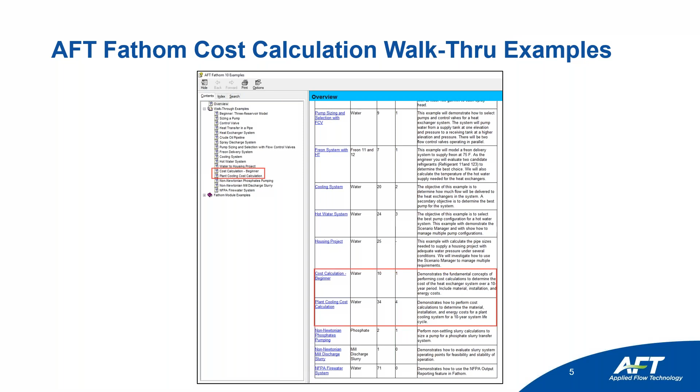All right. So calculating costs can be done with AFT Fathom and AFT Arrow. Obviously, I'm going to be demonstrating this capability with AFT Fathom today, but the process in AFT Arrow is exactly the same. So nothing's different. So if you have AFT Arrow, you can do the same thing that I'm doing here with Fathom today.

So you can easily report the following types of costs: material costs, installation costs, those would be your non-recurring, and then you can also do maintenance costs as well as energy costs. And you can apply these types of costs to just about anything in your model, the junctions, pipes, as well as the fittings and losses. So if you have tees in your model or bends, you can also include those in your physical graphical model, and we can account for those costs as well.

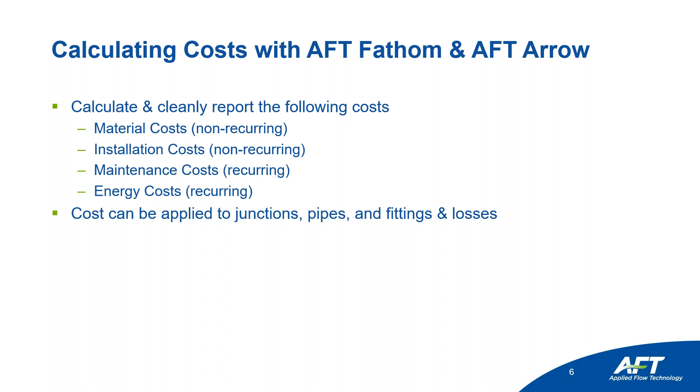And when you do your cost calculations, you're going to be using engineering databases a lot as well as cost databases. And again, if you watched the previous webinar that I did on database management, that was all about engineering databases. A cost database would be associated with a particular engineering database. You're going to see exactly what that looks like in today's webinar. You can also have multiple cost databases for a single engineering database, different vendor costs, different currencies, etc.

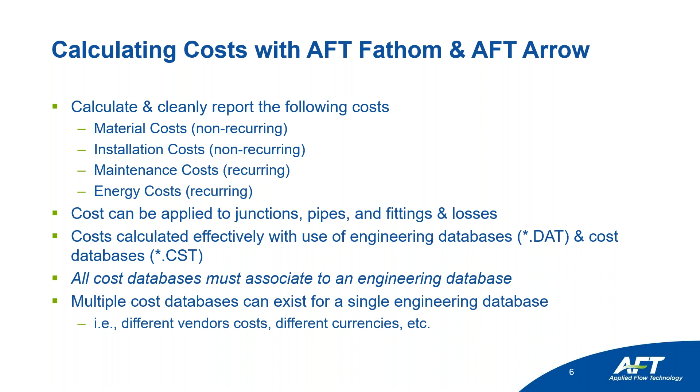So here's how databases are related to each other in the software. I have my overall Fathom model, and then in the database manager, which you'll see today, you can have multiple engineering databases and cost calculation databases. There are several engineering databases that are already built into AFT Fathom. There's the AFT default internal database that contains all of your loss factors. It contains fluid properties, insulation data sets, even things that you wouldn't actually calculate costs for. That's where we've included all of our fluid information, the AFT standard fluids. That AFT default internal database is an engineering database.

The AFT local user database is an engineering database. So anything that you create that's custom on your computer, whether it's custom pipe materials, custom fluids, custom components, custom fittings, all of that information is going to be stored in your local user database on your computer until you share it with somebody else. That local user engineering database is an engineering database.

And then finally, we have all of our pipe materials that we have included for you. Those are engineering databases. So in my plant cooling model today, I'm actually going to have 3 engineering databases. I'm going to have the steel ANSI pipe material database that's built into AFT Fathom. I'm going to use the default AFT internal database for the fittings and losses on my pipes. And then there's an external engineering database, which is a custom database for my pumps. And then I have my material and installation costs available for all of those.

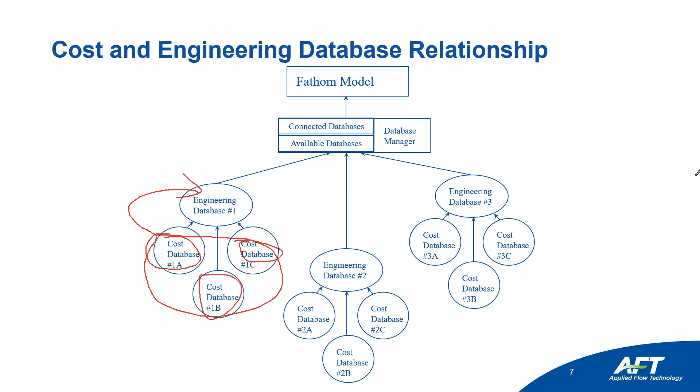So again, the reason why you can have multiple cost databases for a single engineering database is if you have steel piping, you can have different cost databases that you would use, which could be different vendor costs or different regions, different currencies. And so all of those can be associated to one single engineering database. Today, I'm only dealing with one cost database per engineering database.

All right, so the way that you would enable your cost calculations is really easy. You just go to the analysis menu in AFT Fathom, and then under cost calculations, you would choose to do either pump energy only or calculate. Pump energy is just a quick and dirty method of being able to quickly calculate what your energy costs are. So if you have multiple pumps in a model and you just want to know how much it's going to cost to run your pumps, then that's where you could just keep it simple and do energy costs.

The second option is obviously more advanced, and that's where you can calculate all of your system costs. So if you click on calculate, you could do material, installation, maintenance, and energy. And that's what we're going to do today. We're going to do material, installation, and energy costs. We're not going to do any maintenance costs in today's example.

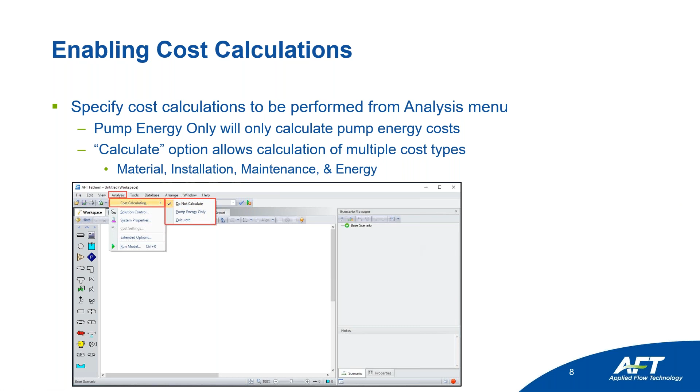A quick aside is we don't have labor costs listed here. So what you might do if you want to account for labor costs is perhaps include that as more of a maintenance cost item. And that's how you could probably account for labor costs if you want. But this is just really giving you a good idea of how much the system will cost by itself, not the people required to build it.

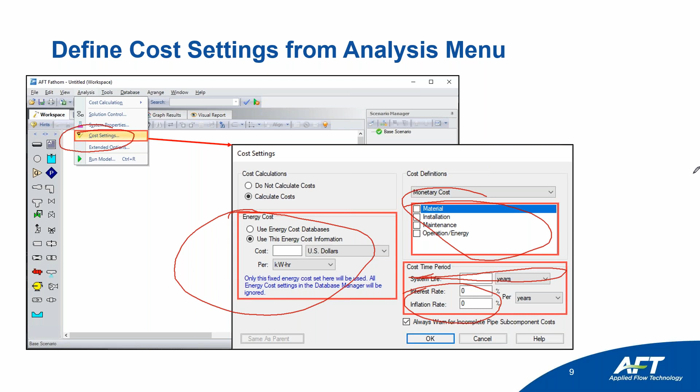All right. After you go in and determine which types of costs you're going to calculate, you then have access to the cost settings window. This is where you define your energy cost information and which types of costs you're going to calculate. You can enter a system life, years, months, days. You can do interest and inflationary rates, a lot of flexibility there. And we're going to see that here really quick with our model.

So this is the plant cooling system that I'm going to calculate the costs for you. So in this particular model here, I have a cooling water system where I've got cooling tower basins right here, and then from those basins, we've got 4 pumps here in parallel, and those are going to circulate water through the system out each of these individual spray nozzles. And so that's my system here.

Wherever you see these little ampersands, that's a new feature that we came out with in AFT Fathom 10 and AFT Arrow 7. And what that little red ampersand means is inside those pipes, if you were to open up the pipe property window, we've included fittings and losses. So that's a good visual indicator on which pipes we've included fittings and losses for. So you can account for costs in those fashions as well.

So when you're building your model of your system and you want to do your cost calculations, you don't have to use a whole bunch of junctions like elbows and area changes just to account for their costs. You can include them in the pipe itself, and then that's how you'd be able to keep your model simplified and still know how much everything's going to cost.

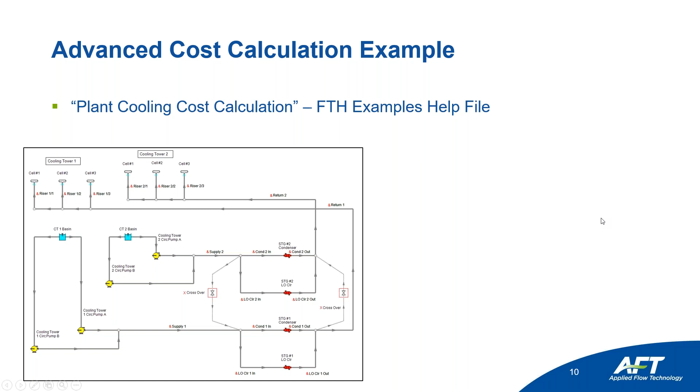All right, so what I'm going to be calculating today is several different types of costs in this model. So this is the plant cooling cost calculation example. We want to determine what the material, installation, and energy costs will be over a 10-year period. And so there are several databases that are going to be used in this example. There are 3 engineering databases for this system, which are already pre-built.

The first one is the Steel ANSI Pipe Material Database. That's what we have included with the standard software so you can use steel piping. That's the engineering database that we're going to use for the pipes. Second is we have the AFT Default Internal Database. Again, this is a database that contains all of our handbook loss factors and loss models, the AFT standard fluid information, etc. So the AFT Default Internal Database is going to be our engineering database for the fittings and losses.

So if you want to calculate the costs for the fittings in these particular pipes here, we're going to associate that cost database that we'll create from scratch with the AFT internal standard database. All right. And then last but not least, we have an extra database that is created for this example. So if you are working through the walkthrough tutorial, it will show you how to connect the plantcooling.dat database. That's a database that contains essentially just the pump curve information. So when we connect that database for the pumps, we can do the calculations for the pumps as well. So the plantcooling.dat file, that's our engineering database file for pumps.

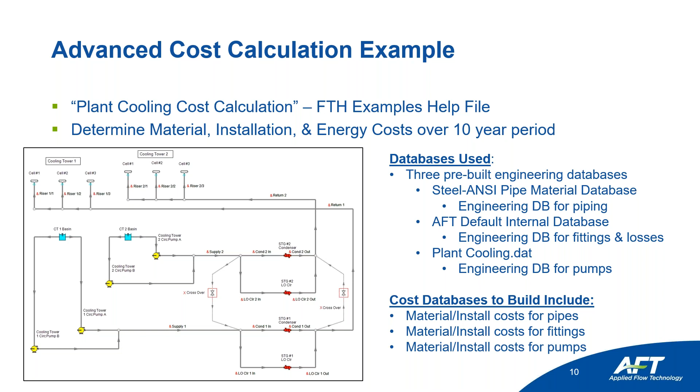And then the cost databases that we need to build from scratch for this system are going to be the material and installation costs for the pipes, material and installation costs for the fittings that are lumped into the pipes, and then finally the material and installation costs for the pumps. I have all my cost information here in a spreadsheet. So these are my costs for Schedule 20 steel piping, and I have ranging diameters from 8 inches up to 30 inches, and then I have material and installation costs in terms of dollar per foot.

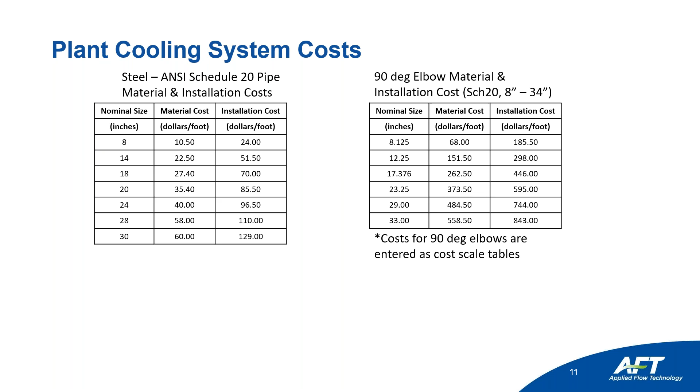And then I have material and installation costs for the 90-degree elbows that I've lumped into the pipes. So we're going to do the elbow cost in a little bit different of a fashion. We're going to use what we call cost scale tables. And the cost scale tables make it easier to create your elbow costs just based upon how the pipe size scales itself. So here's all of our cost information that we're going to use there.

And then last but not least, we have our pump cost information for the material and installation. So the cost of the pumps is just under $29,000. Installation costs under $13,000. Keep in mind, all of these costs were built for the plant cooling cost calculation example, which was probably developed 10 to 15 years ago. So these costs are very, very old. And nowadays, if you were trying to do the same cost, the cost values would probably be a lot more. So just go with it.

A little aside is if you wanted to start with these costs and then you know how much these costs have scaled up over time, you can use cost multipliers. I'm not going to talk about that today. You can read about what cost multipliers are in our help file. But if this is all the information you have and you have an idea of how much those costs have increased over the years, the cost multipliers can help you start with these costs and then it'll automatically multiply them for your actual cost calculations for what it would be today.

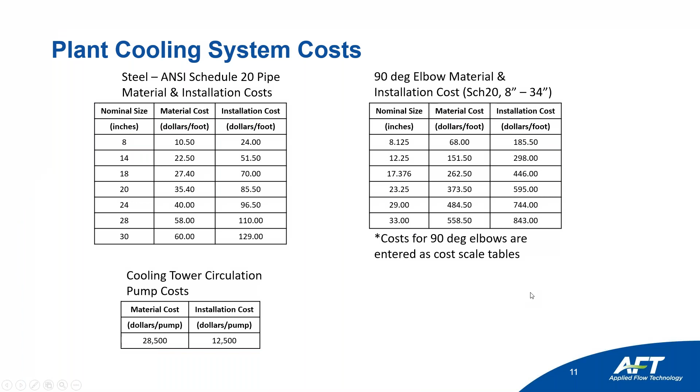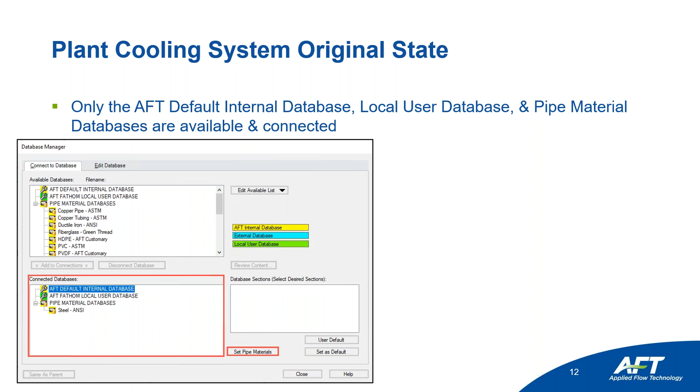All right, so this is probably the last slide that I'll be showing before I jump into the model here. So yes, it is. So let me go ahead and jump into AFT Fathom now. So I'm going to move my PowerPoint over to the side here, and here's my Fathom model. So this is the Fathom model that I really stripped everything down. I stripped out all of the database, like the plant cooling database for the pumps, etc.

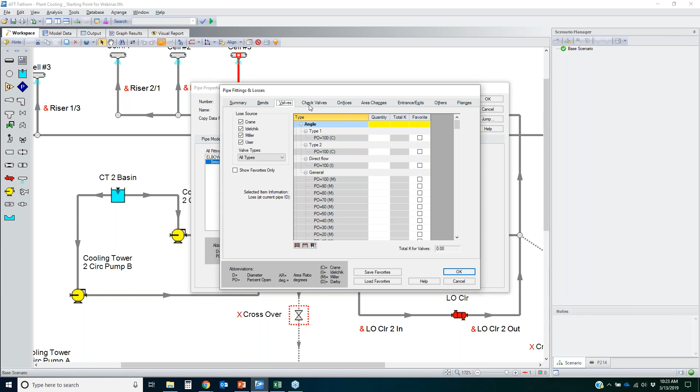So you can do elbows, valves, check valves, orifice plates, etc. So any of these fittings that you're lumping in with the pipe fittings and losses tab, we can account for those costs when they are lumped into this list right in here.

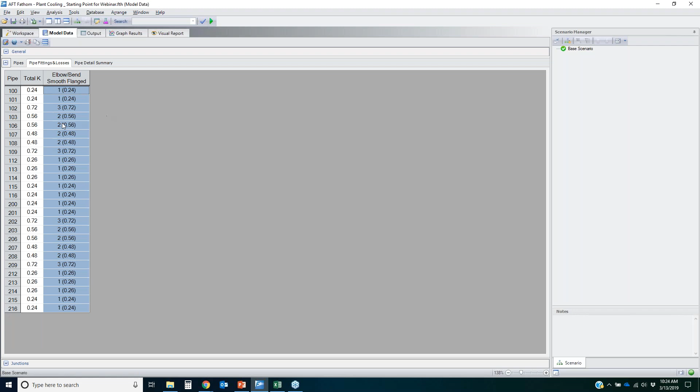So if I close out of this window here and I go to the model data tab, you can see on the fittings and losses tab here that there are several pipes which contain additional fittings. So some pipes have 3 elbows, some only have 2, some only have 1. You can see what the total K factor is for that, and we're going to account for all of those costs as well. Just for keeping these calculations simple, we only have elbows, but we could throw in other fittings as well if we want to.

In addition to the pipe fittings and losses, if you go to the pipes tab here, this contains the input information for all of your pipes throughout the model. So I've given custom names to all the pipes here, and if we scroll over to the right, they're all based upon the steel ANSI material. So if I open up one of these pipes here, in each of the pipes, I've chosen steel ANSI from the drop-down menu, and I'm using Schedule 20 as the type. So there's Schedule 20 for all the pipes. Note that that is different than using standard Schedule 20.

So one little aside is that if you're doing these cost calculations and you use standard Schedule 20, but you build your cost database for the piping using regular Schedule 20, you wouldn't see the cost. So you've got to make sure that when you're defining the cost, it matches what you've defined here in this drop-down menu, which in my case is going to be Schedule 20. Now, the reason why you're not seeing a whole list of other pipe materials in this drop-down is because I've hidden those items, and I'm going to show you how you can do that.

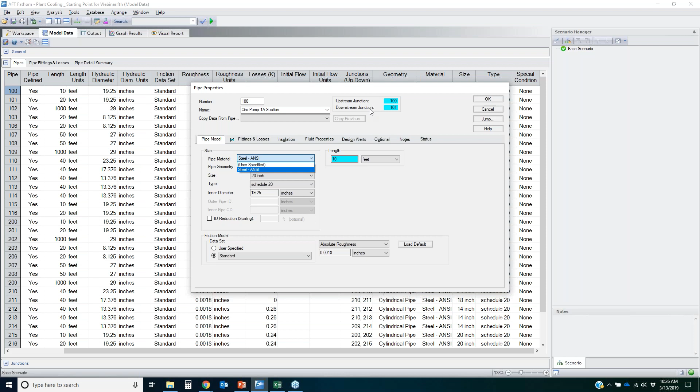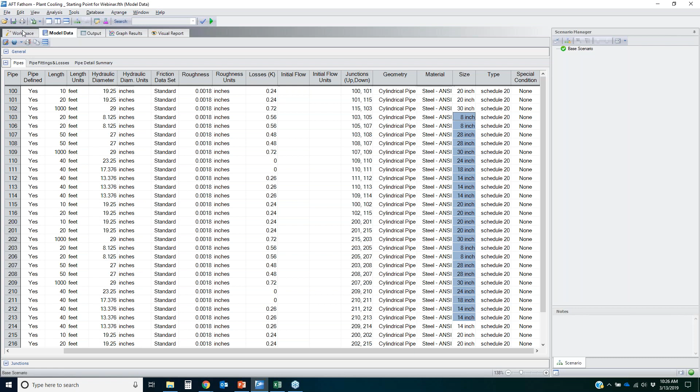So here's all my piping information, and you can see how my sizes range from 8 inches in diameter up to 30 inches in diameter. So now back to the workspace here. If I go into the database menu, the database manager tells you which databases are available and which ones are connected. The available databases are databases that are available for you, but the connected ones are the ones that you're actually going to be using in this particular model.

If you read the blog articles that I wrote on databases, then you'll understand better what the differences are between available and connected. Basically, if you want to use a database at all in your model, you just have to make sure that it's actually connected. And by default, when you add a database, that will usually automatically connect it for you. So here, if I click on this drop-down menu for available databases, there's all of these pipe material databases that we have included for you in the software.

So the internal default database, if I select that and review the content, then you can see here that we've got all of these fluids that we've built in for you. So these are the AFT standard fluids. We have various insulation data sets, and we've got fittings and losses. So the default internal database contains all of this information for you.

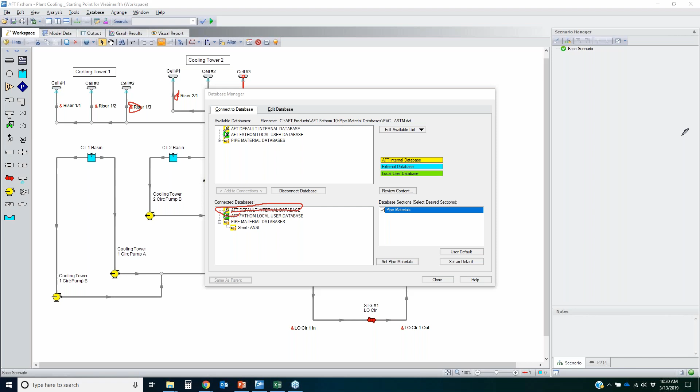The steel ANSI database here is the engineering database that will be used for the pipe material and installation costs. The default internal database is going to be used for the material and installation costs of the pipe fittings for the ones that have the little ampersand on them. And then finally, there's an external database file that we will add in a little bit later for the pumps.

So the way that I'll access that database is by clicking on Edit Available List, and then I'll add an engineering database. And then once I find the database I need, which is this guy, I can open it and it will connect it and make it ready for me. I'm not going to do that yet. I'll do that here in the next few minutes. So this is my starting point.

All right. So here's how you start with doing the cost calculation. So I'm going to go to Analysis and then Cost Calculation, and I'll click on Calculate. So that activates cost calculation abilities for me. Now, one quick thing is if I go to the red status light right here, when you turn on one of the cost calculation options here, either pump energy or calculate, there's a new checklist item that becomes available, specify cost settings.

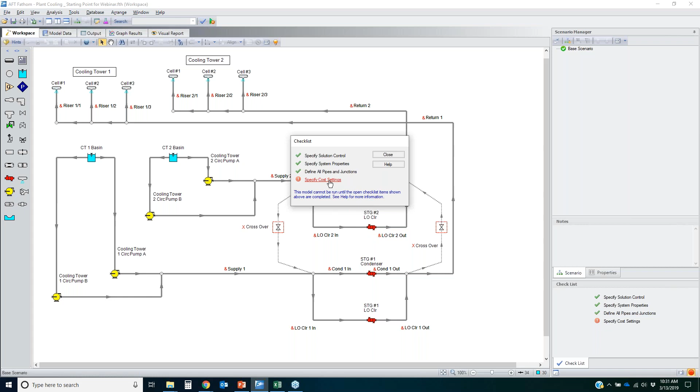So if you want to do cost calculations, you have to define that information. If I tried to run my model, it wouldn't let me because I'm missing some information. It would say, define your cost settings. So I can access the cost settings window just by clicking on it here, or I can access the cost settings window by clicking here, or I can go there by hitting the Analysis menu and then Cost Settings.

So in this model here, you could use an energy cost database if you want, but in my case, I'm just going to use a constant energy cost, which is going to be 10 cents per kilowatt hour, keeping it simple. And I'm going to do material, installation, operation, and energy costs. I'm going to do a system life of 10 years. Now, you have a lot of flexibility with doing different unit sets for costs.

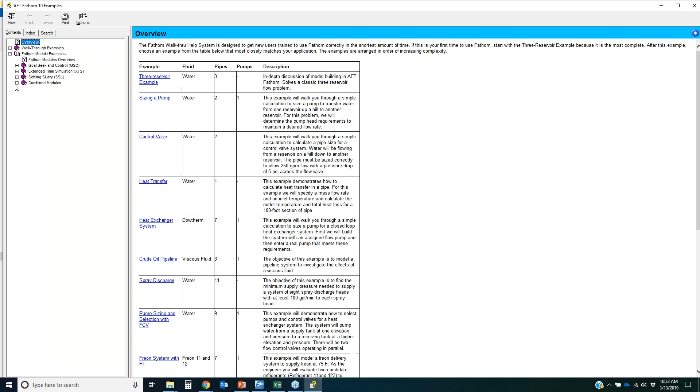So one example, let me show you a quick example here. If you open up the Fathom Examples help file and you go to Fathom Modules and then Combined Modules, this is a really interesting example because this simple system uses the goal seek and control module, the extended time simulation module, and cost calculations at the same time. So on my assigned flow junction here, I have a flow rate that is changing throughout a 24-hour period. So that's my changing flow demand.

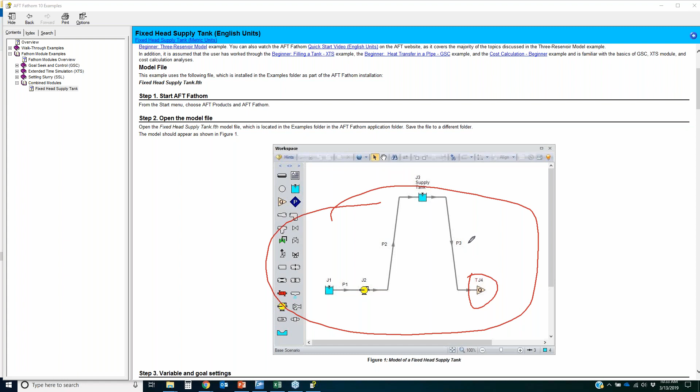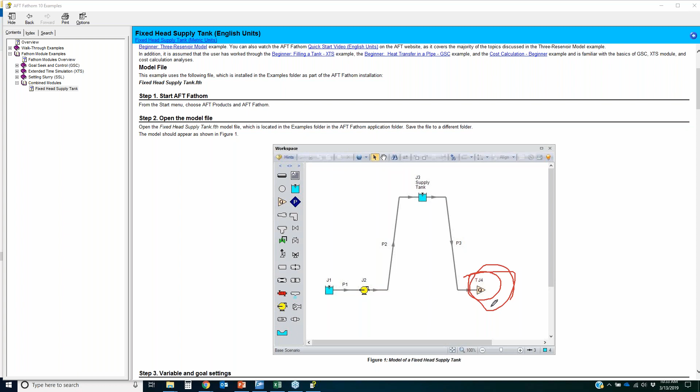And then I want to do a finite tank right here. And so GSC I'm using to change the pump speed at each time step to maintain a constant liquid height. And I want to calculate the cost of my pump energy. So the key thing is the transient data with XTS that I use to apply for my changing flow demand here is over a 24-hour period. But I want to know how much it's going to cost to run my pump in the same fashion over the 24-hour period for a year.

So this is where you can do an XTS, a transient simulation for a single day. And then if you want to do the cost calculations, that's where you can use different time units to decouple your system life for the cost calculations and your XTS time period. If you went through and read that example, it would illustrate what I'm talking about. Just a little aside though here.

All right, so I have this all set up. The blue highlighting indicates required input. So I've got all that information there. I'll click OK.

Now I have specified my cost settings. I could run my model and get results, but now I need to actually define the cost information. So this is where you start building your cost databases from scratch. And once you go through the process of doing it, it's really easy. It may look a little bit daunting, but after you see how I do it here, it'll be a piece

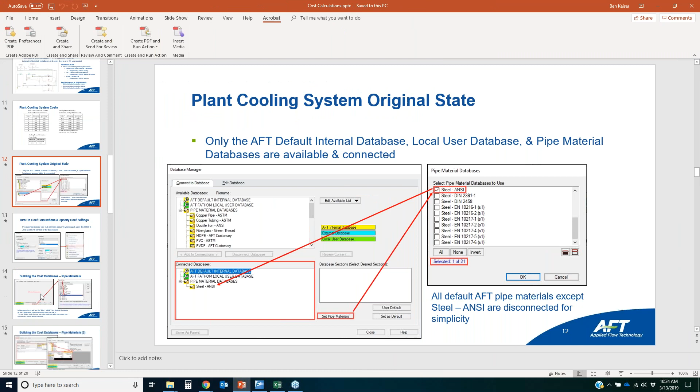of cake for you. So the first thing I'm going to do, if I go back to just show you the reference of where I'm at in my webinar, is I'm going to develop the cost databases for my pipe materials. So here's how we do this. Now that I have my cost settings defined, I can go to my database menu, and now we have the cost database, which is available.

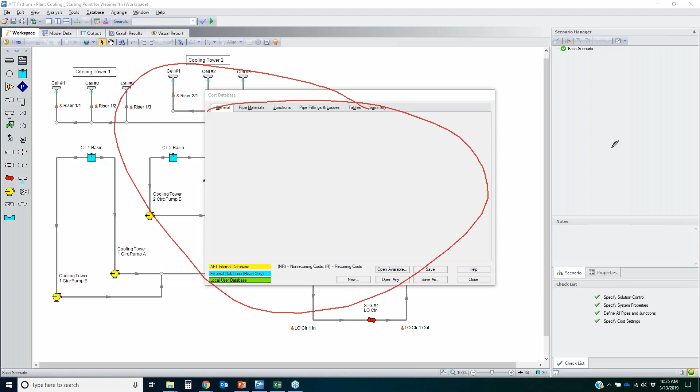Okay, excuse me. So if I go to database and then cost database, this is the window that I will use to build all of my cost information. So I'm going to go through and build separate databases for materials, fittings, and then the pumps. So what I'll do first is simply click on New, and I'm going to create a new cost database for the pipe materials. So here's how we do this.

I'll click on New, and then this is where you'd specify which engineering database you're going to use for your cost information. So because I'm creating a cost database for my pipes for material and installation, I'm going to choose Steel ANSI because that's the pipe information I'm using in the model. So I'll select Steel ANSI.

If you have a custom pipe material that we have not provided in our software, you could easily create your own custom pipe material database, and then it would appear in this list that you can use to do your costs for it. And again, if you read my blogs, you'll see how you can do that. So here, I'm going to click on Steel ANSI, and I'll click on Select.

And then this gives you some basic information. Once we click on Save, we need to create a cost database file name. So I'm going to do that first. So I will click on Save. Well, first it's going to make you give it a description. So you can change your cost type or your units. In this case, I'm going to call this pipe material and installation costs. This is for Steel ANSI piping. So you can do whatever kind of notes that you want.

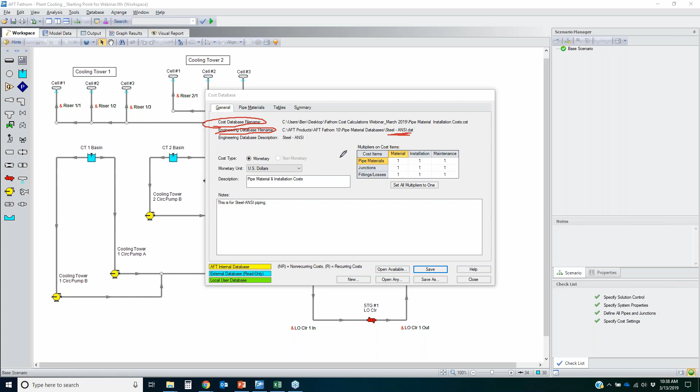So now this gives me more information. It's got my database file name, the engineering database that's connected to, which is the Steel ANSI database, and now I'm going to define the cost information. So if I go to define cost information, you would click on pipe materials, and then the old-fashioned way is you would click on the pipe material that you want to define cost for. Then you have to find the appropriate size as well as the schedule.

So if I want to do costs for 8-inch schedule 20, I would select that schedule first and then click on new cost, and you can give it a description like 8-inch material cost, and then you'd pick a type. So this is going to be my material cost, and then dollars per foot. This is where you would get it from your spreadsheet. That's $10.50 per foot, 10.5. You could do cost per mass as well if you want.

And then I want to do a second cost, which is for installation. So I'll click new cost again, and then I could call it 8-inch installation cost.

And then I would change my cost type to installation, and then you put your value there. And so this is what you would do to go through and define these costs for 8-inch, and then maybe 20-inch, etc. As you can see, that's a bit tedious.

I mean, it's really easy, but it would take you a little bit of effort to go through and do schedule 20 for 8-inch, and then my next size would be 14-inch, so I'd have to go to 14 and then pick schedule 20 and then do my costs. So that's how you used to have to do it before.

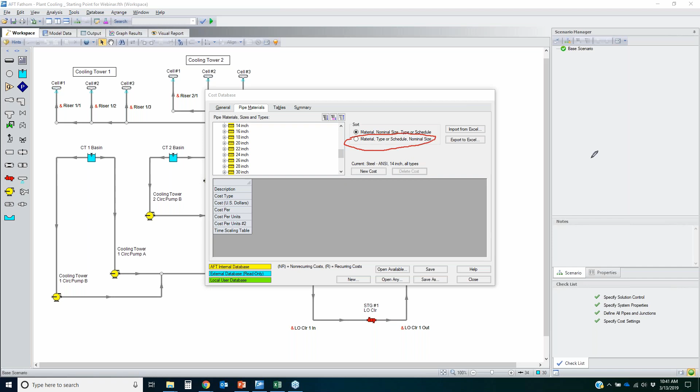I would recommend using the second option because it might be a little bit easier to do your cost information for all different sizes within a particular type. So if I choose this option right here, you'll see how things change. So if I click on my material dropdown, I now have everything arranged by the schedule themselves. So if I go down here and then do schedule 20, here's all my different sizes that are available for schedule 20. So this makes it a little bit easier to organize your piping information.

So what I'm going to do now is I'm going to click on schedule 20, and I'm going to export all of these sizes to an Excel file. So if I click export to Excel, this is the format that it's going to look like. So I've got my material name and then size and then type. So hopefully this gives you an idea of why it might look easier to do the sorting in this fashion for all your costs. So you just put your cost information here in your spreadsheet, and then you can import it back in. So once I have my format here, I'll click on export.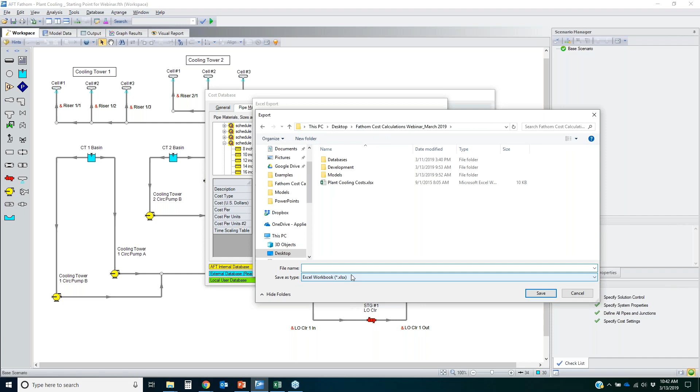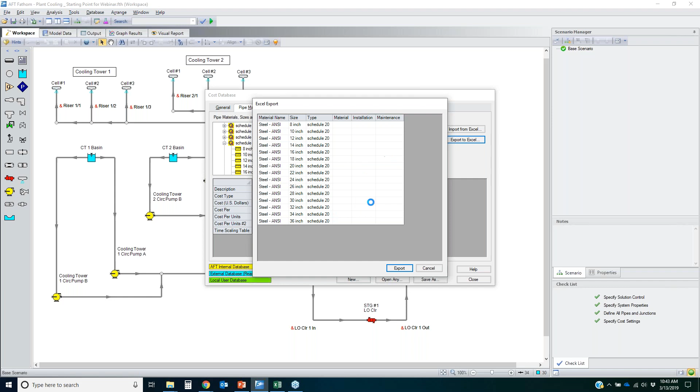And right now this is exporting to a spreadsheet. So I'll call this pipe material cost information. So you just give it a few seconds or two, and it's going to create an Excel spreadsheet with this structure here. And once it finishes exporting that data, it'll tell you when it's done. So now it's finished exporting all that data.

So I can go to that folder on my computer, and I'm going to do this one right here, pipe material cost information. So that spreadsheet will open up here. All right. So here's my structure that I'm going to build my cost information for. Now, as you can see, if I open up my original cooling cost spreadsheet here and move this over to the side, I'm not doing costs for every single pipe size. There's a lot of them that are stripped out of here.

So when you're doing cost calculations, the neat thing is that you do not have to have a cost for every single size in order to do your cost calculation. So I'm missing 22 inches here. So if I actually do have a 22-inch diameter pipe, I can still get a cost for that, because what Fathom will do is it's going to interpolate in this table in order to get costs for other sizes that are not explicitly listed in that list. So this keeps things a little bit more simplified for you.

So what I'm going to do here is in my spreadsheet here, I'm going to remove some sizes. So I'm going to remove 10 and 12 inches in diameter. So I'll delete those rows, and then I'll delete the 16-inch diameter. I'm going to delete 22 inches in diameter. I'll delete 26 inches in diameter. And then we've got 28 and 30. And then I'm going to delete everything after 30 inches in diameter.

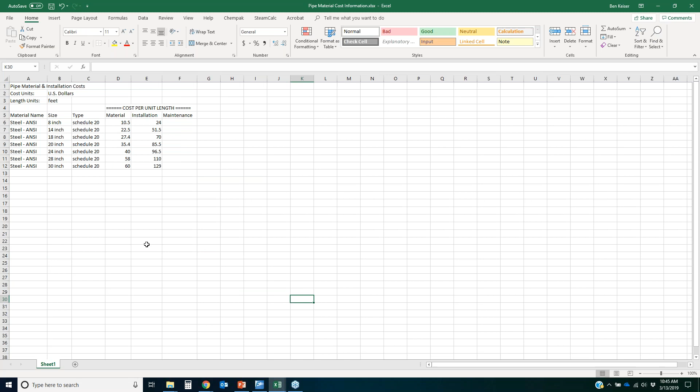And then I'll do the same thing for my installation costs. So I've got my installation costs right here, so I'll copy that data, and then I'll paste it here, copy it, and then paste in the values. And then I'm going to delete that information and remove the borders because of my OCD. And you can keep maintenance here, but you don't have to actually put anything in those fields. So you can keep it blank just like it is.

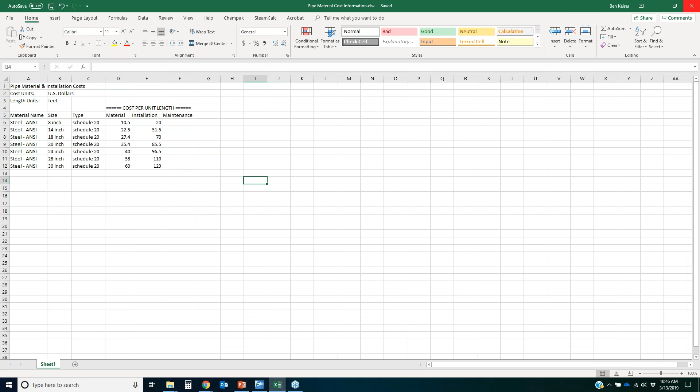And now I'll save this pipe material cost information. I'm going to close that file. I'm going to move my costs over to my other monitor. And so now when I go back into Fathom, I'm going to import those costs from Excel. So here I would choose pipe material cost information, and I'm going to open it, and this will automatically import all those costs for me. And it makes it really super quick and easy. So we'll just give it a second here. Excellent. Cost data import is completed.

So if I click on 8-inch, you can see that we've got material, as well as I accidentally duplicated one of these costs, so I'm going to delete that. So I've got material and installation and my cost information there. If I went to my next size up, which is 14 inches in diameter, you can see that information. The next size from there was 18, and then we have 20, and then we have 24. Now, obviously, there's nothing for 22, so it's not going to create interpolation here. It'll just interpolate when it actually does the calculations.

So all my cost information for my pipe material and installation is now defined. So I'm going to click on Save. And now if I click on Close, when I go back into my database, I can go to my cost database. And if I click on Open Available, I now have an available database. So it's pipe material and installation costs. And you can see that information that we created here.

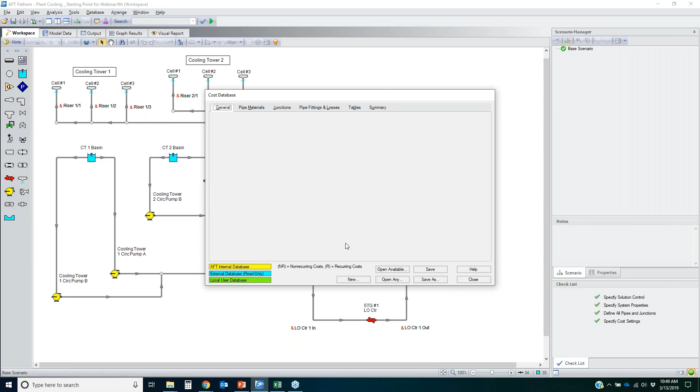I'll go to Database, Cost Database, and now we're going to do the fittings and losses. So first step is to click on New, and second thing, just like I did before, I have to choose an engineering database that will be used for my cost database. So the engineering database that has all of the loss factor information for those fittings is going to be the AFT default internal database. So it's already built for you. You just have to select it and click select.

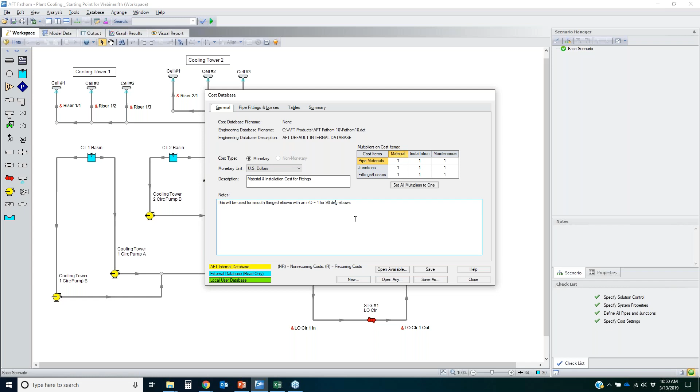So now I'm going to give it a name. We'll call it material and installation cost for fittings. And then I'll say this will be used for smooth flanged elbows with an R/D equal to 1 for 90-degree elbows. You could type in whatever notes you want. You could maybe put in vendor information, etc. So now I'll click on Save, and we'll give it a name. So this will be called elbow fitting costs.

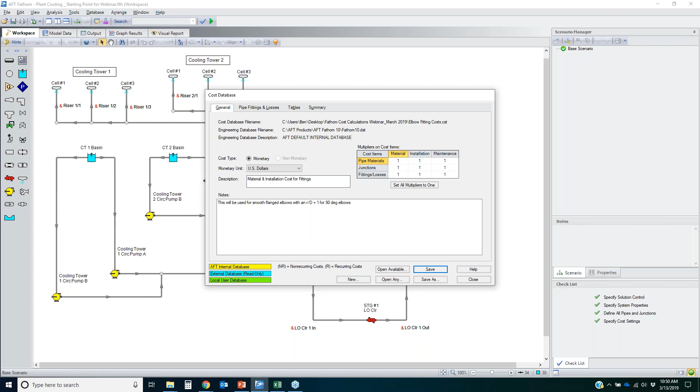Yes, I want to make this database available and connected. So now I'm going to create my cost information. So if you went to pipe fittings and losses, similar to before where you would expand and drill down to the specific type that you want to use, you can do a new cost like this.

But rather than doing it one by one, there's a much easier way. So I'm going to delete that cost. And so instead of defining the cost information one by one, I'm going to do the tables option, because for the fittings and losses, it's a lot easier to create your cost information where your cost scales with the diameter of the piping. So I'm assuming that my elbow is similar to my pipe diameter, and this is how I'm going to scale my cost information for that.

So I'll click on tables and then new table, and then we'll give this a name. So this will be called 90-degree elbow, if I can spell correctly. There we go. And then I'll call it material. You can do a table type in different ways: diameter, time, power, CV. So maybe your cost changes by CV if you want. I'm just going to do diameter. So this references the pipe diameter that the elbows would be using. And then I'll do cost.

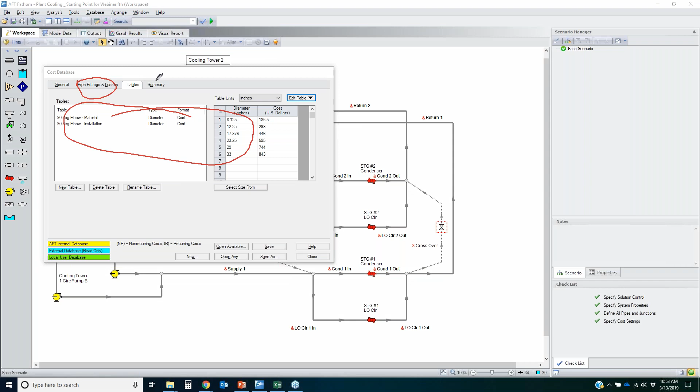And after you go through and you set up these cost tables, there's one more thing that you need to do. And this is where you go back to the fittings and losses tab. So once you create your cost scale tables, we go to the fittings and losses tab, and this is where you would drill down to your specific fitting. So I'm going to go elbow and then smooth flanged with an R/D of 1, 90 degrees. And I'll click on new cost, and this is where this makes it really easy.

steel pipe material. And once I go down here to use the size table, I'm going to use table of costs, and then I scroll down just a little bit more, and I'm going to use my material scaling table. So it's just a few clicks of some drop-down menus. Next, I'm going to do another cost. So this will be 90-degree elbow dash installation,

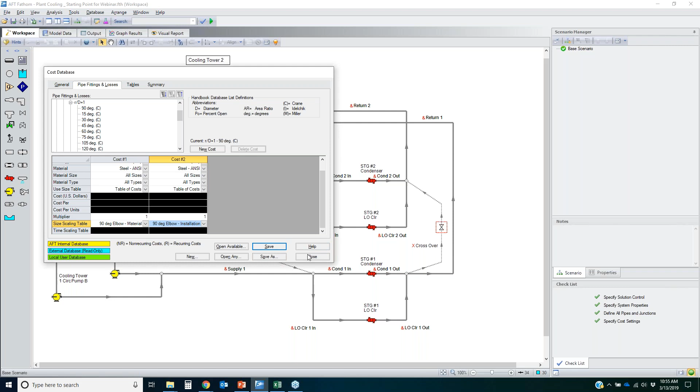So I'll save this, and I'll close that. So now if I go back to my database manager, we can now see that for our internal default database, we have a cost database for the pipe fittings and losses.

So now those are our two cost databases so far. We've got one more. That's our cost database for our pumps. So if I close this and I open up my pumps here, initially I'm just using random pump curve information. If I want to do a cost calculation for these pumps, then there needs to be a database. So I will eventually click on database list, but there's nothing to choose from because I've not connected that database

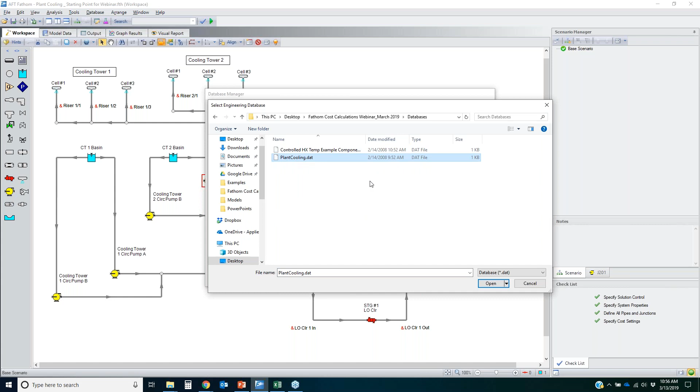yet. So if I go to database and then database manager, I would click on edit available list. I'm going to add an engineering database. So that's going to be the plantcooling.dat. So I just open it up. And if I open that, I've got my plant cooling engineering database. If I select it here and then review the content, you can see that you've got some pump cost information in there. So that's the first step. So I'll click on close.

Now that my plant cooling database is available, I can now create cost information for it. Give me one second. Okay, so I'll go to database and then cost database. And now I'm going to create my third cost database. Click on new. And now I'm going to use my plant cooling engineering database as my engineering database for my pumps. So I select it, click select, and give it a name, pump, material, and install costs.

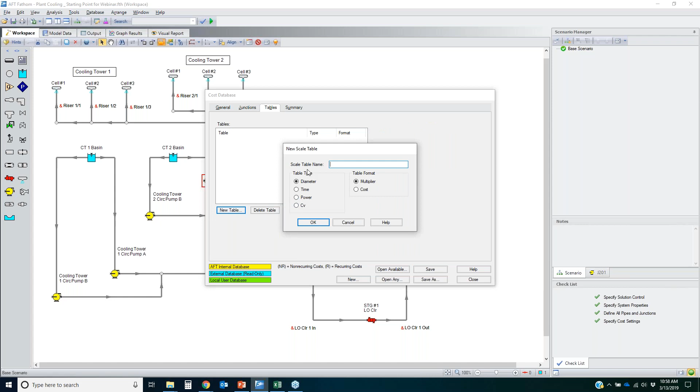This comes from vendor A. Now, I'll click on save, and I'll create my cost database for my pumps. So we'll call this pump cost database. Yes, I want to connect it and add it. And now I go to my junction. So I could use tables if I want, where you could maybe scale your pump cost with power. But instead, I'm only doing one pump. So I've got my engineering database with this particular pump.

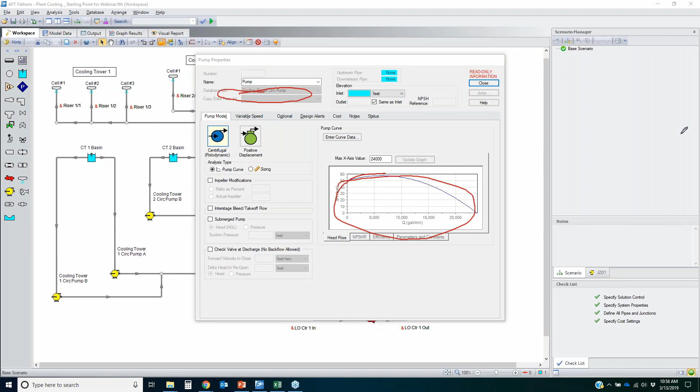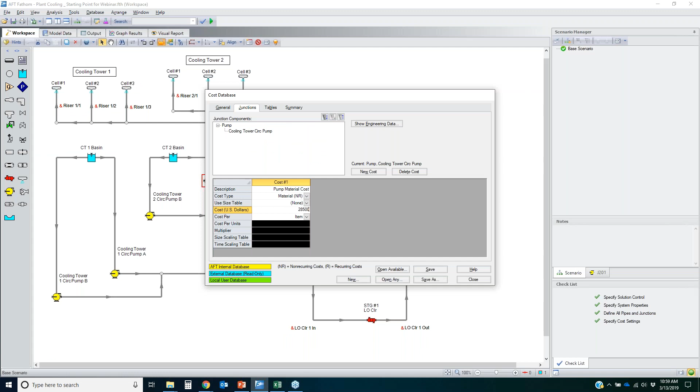If I click on show engineering data, this is the pump curve that is being used for my Cooling Tower Circ Pump. Okay. So that's the engineering data. So if I select this guy and click on new cost, I'm going to call this pump material cost, and then it's going to be material, and that cost is, I believe, $28,500, which it is, so $28,500. This is going to be cost per item, not power. So this is per unit of pump, however many pumps I have.

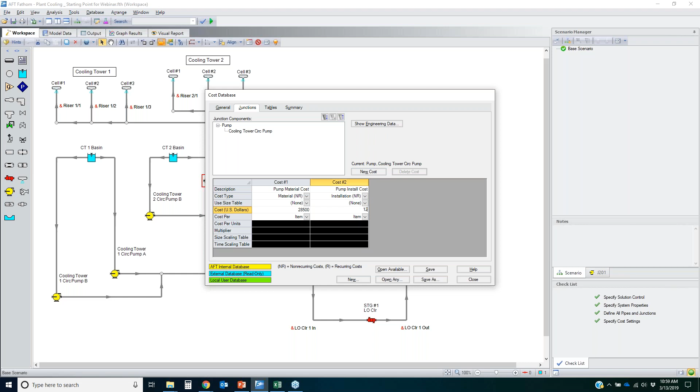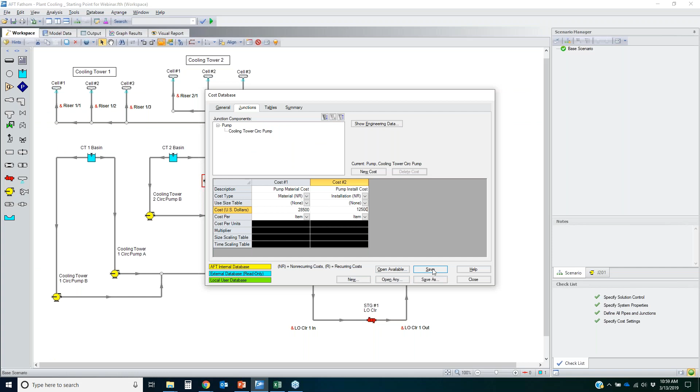So if I click on new cost again, then this will be pump install cost. Change my cost type to installation, and then I'm going to put in $12,500 because that is my installation cost right here. And then I will click on save. That's all there is to it. So now when I click on close, I need to do two things. First, I need to set each of these pumps in my model to access the engineering database and then to include them in the cost database.

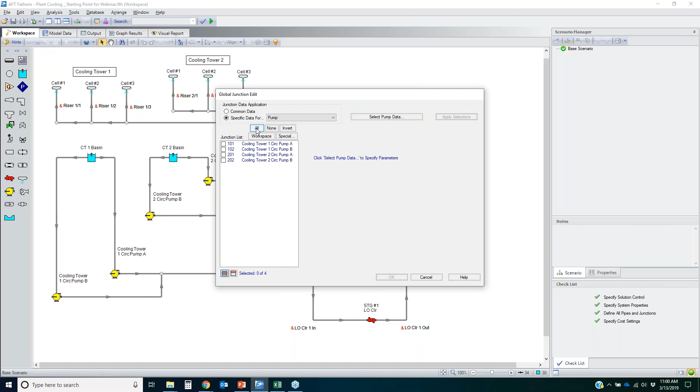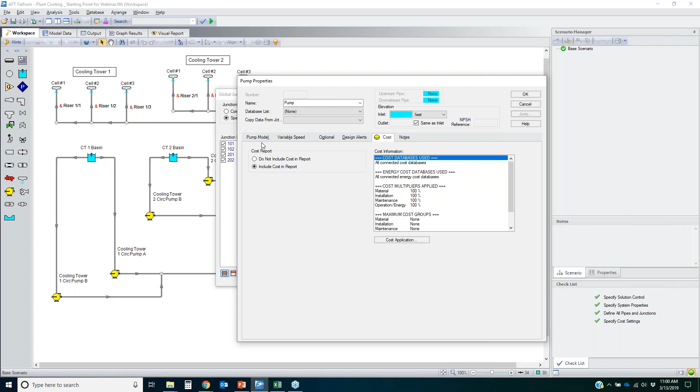So if I click on edit, global junction edit, and then pumps, I can select all these pumps, and this is where I'm going to associate them with the database. So I click on database list, and I'm going to use the engineering database for my pump information. So here's my pump information, and then if I click on cost, I'm going to include these in my cost. So when you click on include cost in report, you can calculate the costs for your pumps. And then we'll click OK.

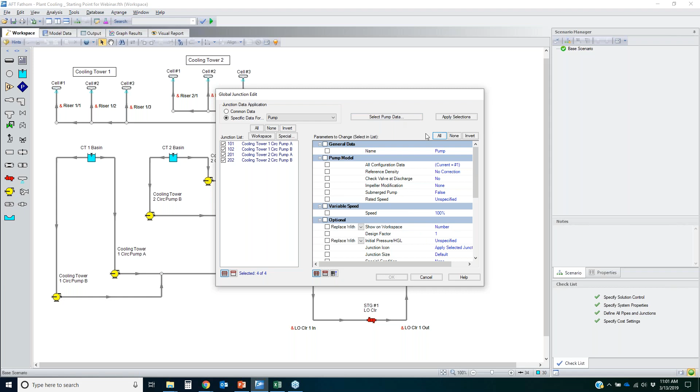So there's only two changes I'm going to make. One change is going to be to use, let's see, I'm looking for my database. So I'm going to include in the cost report. And I'm not seeing something that I should see. I might need to go through and do this one by one. So I'll do database list, and there we go.

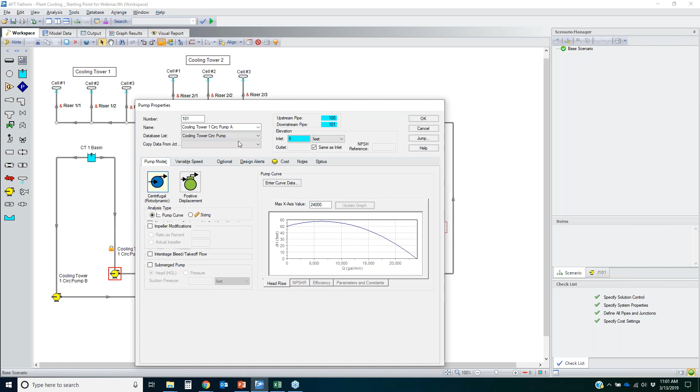So something was finicky about the global editing here. For some reason, when I did my global edit, it was not allowing me to set the database list for all 4 pumps. I'm not sure why it was not doing that. We'll get that fixed in the next maintenance release. Okay, so my pumps are all set up for the cost calculations, and I should be ready to go.

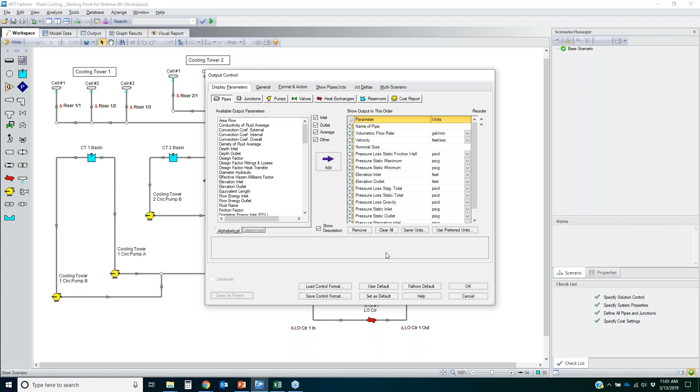All right, so now I'm going to go to the output control window, and I'm going to set my parameters to default Fathom units, and I'm all ready to go. So I'm going to save my model, and I'm going to click on the green arrow to run the model. So it does all the regular hydraulic calculations for pressure and flow and everything.

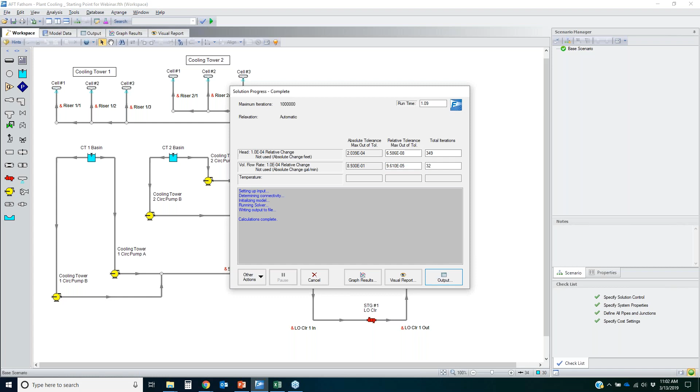And if I click on my output, I now have this warning. It's not critical. I'm doing heat transfer, and it's just telling me that my density is changing. Not a big deal there because Fathom will still do the correct calculations. But what we care about is the cost report. So I go to the cost report.

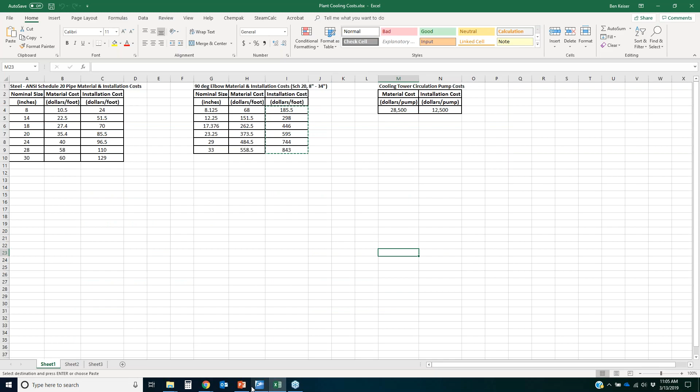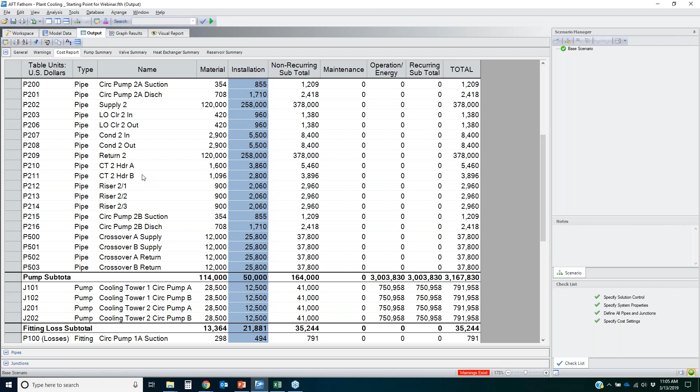Now, this is going to lead into our next webinars in the next couple of weeks. It's one thing to just calculate what your costs are, and there it is. But we are engineers, and we want to be good stewards of society and the world and the environment. So it's important to not just know what your costs are, but to be a good engineer, it's a really good effort to try and figure out ways to minimize these costs.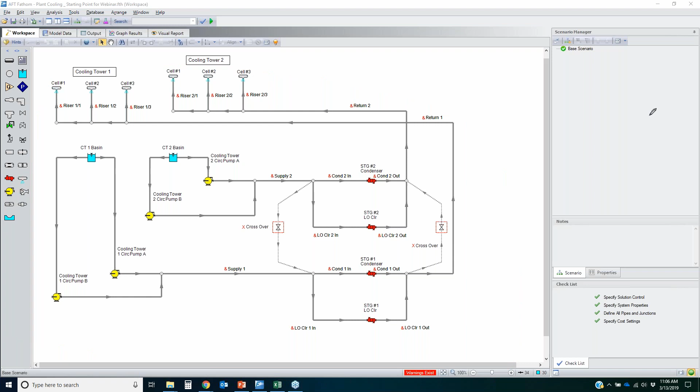So here's my system where I have all my pipe diameters listed out here. What the new automated network sizing module will do very soon is it will have the ability to change the combination of pipe sizes throughout your system. And by using different combinations of pipe sizes, that can be used to take this cost that we calculated of, maybe, your previous system design.

So once you get your previous system design to work with your new requirements, it's $5 million. Okay, can we bring that down to maybe $3 million by changing the size combination in different ways? And the answer is you can, and the amount of savings that you can get is significant.